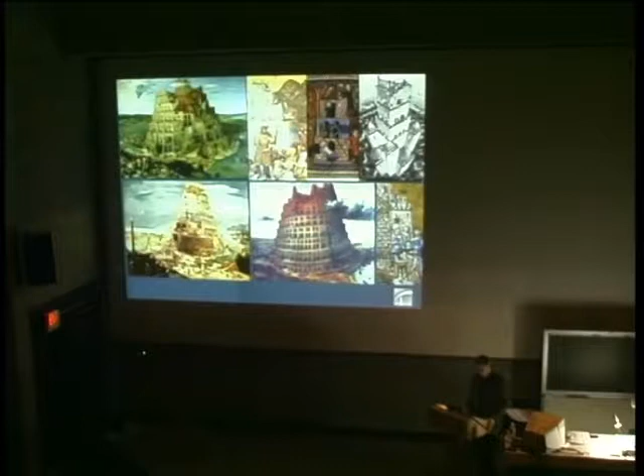These are all examples of the history of tall buildings. And it's not over, of course, as you probably read in the news—some big ones over in the Middle East are underway. All the way from Gothic through Gaudi, the Washington Monument, and the Eiffel Tower.

Chicago holds a special place, though. Certainly for Chicagoans, and I think many others see it as the birthplace of tall building design, if one takes as a definition of a tall building a self-supporting frame—in this case a rigid frame—with a separate facade system.

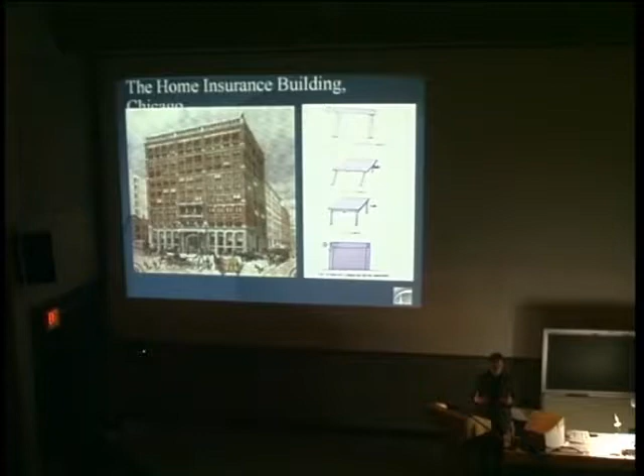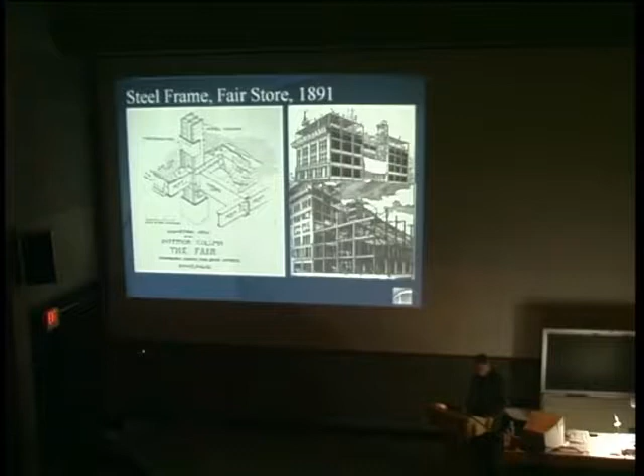In this case, at the Home Insurance Building, the brick was clipped onto the frame, and many found that as a definition of tall buildings, as opposed to load-bearing structures. This is another example of a William LeBaron Jenney building, the Fair Building, which shows the interaction between cladding and structural frame.

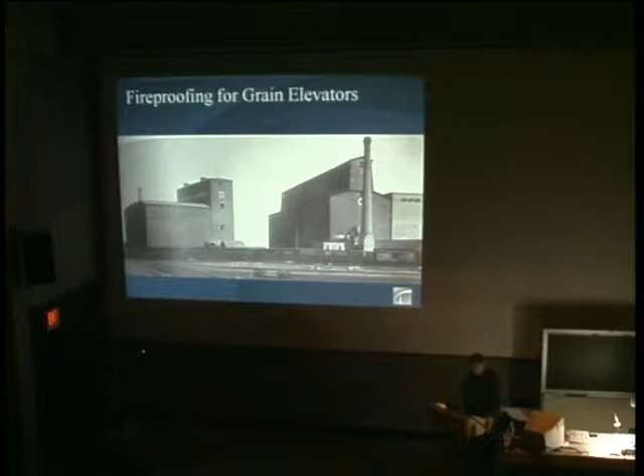There are a lot of reasons why I think Chicago was the center. There was a development of fireproofing for grain elevators, which was more of an industrial product, but turned out to be very useful in the fireproofing of tall buildings as well.

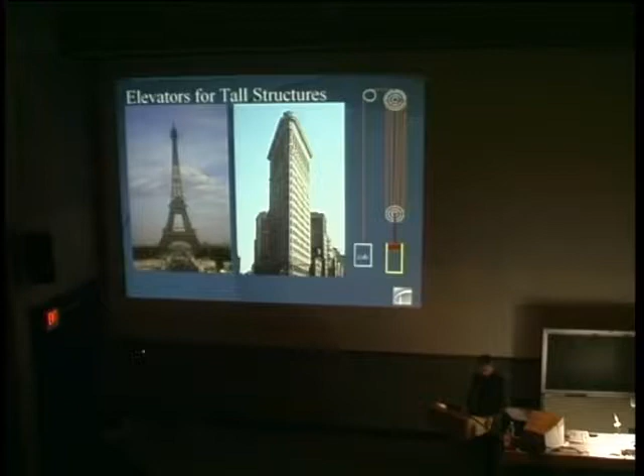Elevators were invented—it's not entirely clear exactly where. They were used in New York and other places, but it was a very critical element that came together more than a century ago that made tall buildings viable.

Going back to the origins of Chicago tall building development, I had the good fortune to work with Myron Goldsmith, who was a partner at SOM. He's passed away now, but he evolved a series of buildings through his thesis at IIT with Mies van der Rohe, which explored ways of scaling tall building structures coincident with how tall they are, and also using the structural concept as part of the architecture.

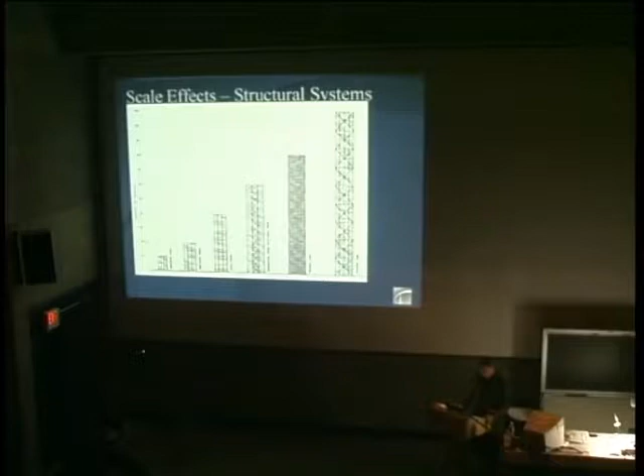He also evolved a series of systems scaled to the height of the building. The notion was that there was a certain scale to a building structural type—not something that could just be enlarged without end. There were a number of projects he worked on with students while teaching at IIT, and many of these worked their way into the offices of SOM, through both Myron Goldsmith and people like Fazlur Khan, who was the structural engineering partner at Skidmore and also taught at IIT.

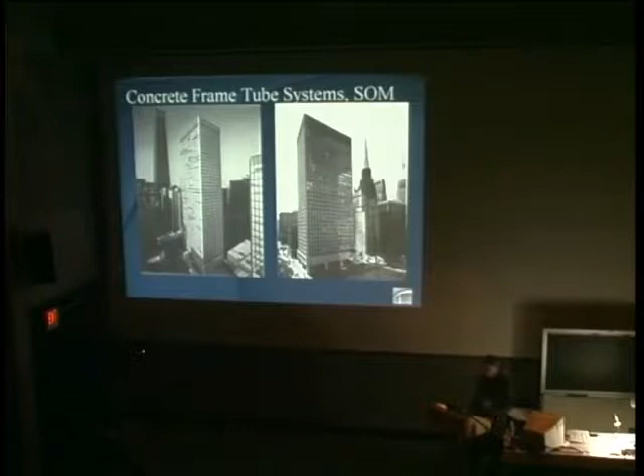These were concrete tubes, which Fazlur Khan sort of invented and utilized in a variety of ways at SOM. That sort of culminated in the bundled tube concept that was fundamentally the structural system for the Sears Tower, the tallest building in the world until just a few years ago, when it was surpassed by the Petronas Towers.

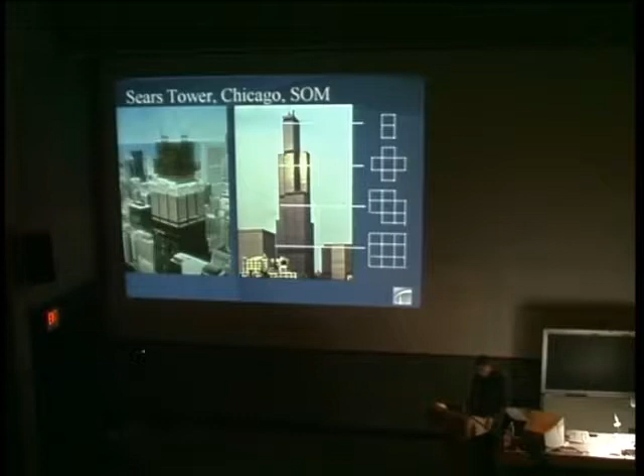But now, of course, there's more in the wings. The Taipei 101 exceeded that, and then there's, as I mentioned, really tall ones coming in the Middle East. There were other systems, other buildings that used this structural expression of the perimeter tube.

The Amoco Center, which was a concrete tube versus the steel tube of the Hancock building. Recently, we worked on a project in Chicago, scaled much smaller than the Hancock building, but utilized a structural frame for a project called Erie on the Park with Lucien Lagrange.

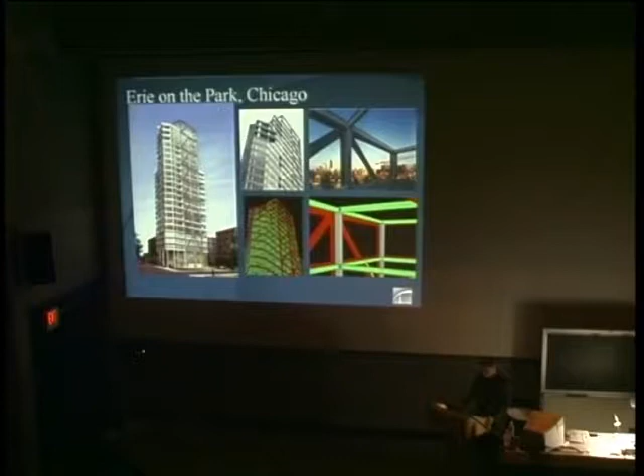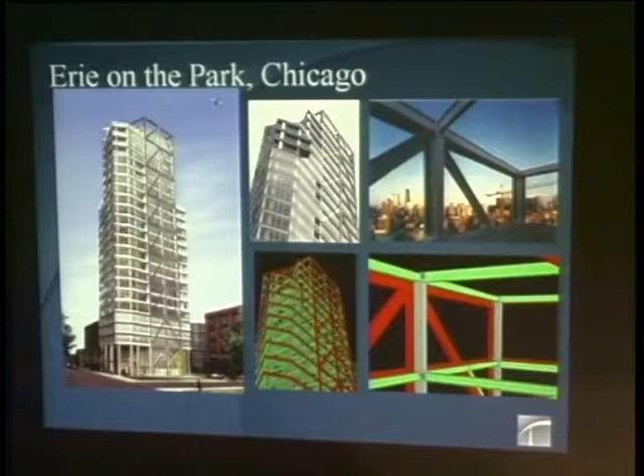It's an all-steel apartment building, not unlike the Hancock building, but we utilized a technique of 3D modeling of the steel frame to help procure the steel frame and have it fit together. I'll touch on this more in the second part, but wanted to mention it briefly here. It did utilize sort of a super frame for that building, and it was part of the architecture. There, of course, are many examples of these type of buildings from New York to Hong Kong.

The Citicorp building, on the other hand, and I did have the good fortune of working with Bill LeMessurier as well, who designed this building. Bill worked with an architect, Hugh Stubbins, who didn't feel it was important to express what was a very efficient building, but rather clad it with aluminum and glass cladding. You can see it at night, though, when it's lit up.

One Liberty Place by Thornton-Tomasetti and Helmut Jahn shows another type of structural system that begins to show the evolution of tall buildings from the tube buildings, which were sort of dominant in the 50s, 60s, and 70s, and certainly the hallmark of SOM, to other mixed systems.

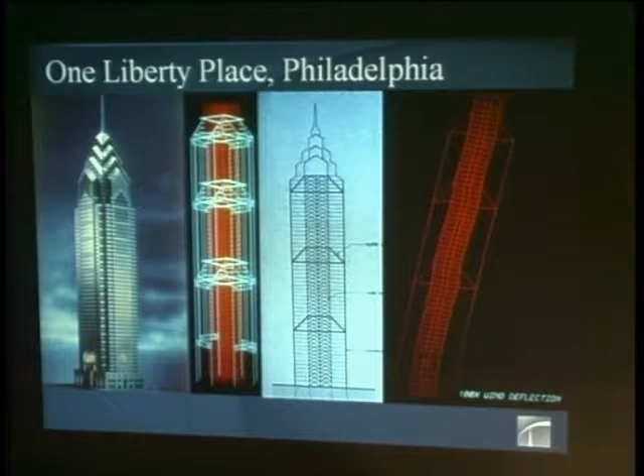This is a system of core bracing and outriggers, and systems like these are in a sense the combination which are making the tall buildings of today. I mentioned one other super frame when I mentioned the sort of evolution from the work of Goldsmith and Khan from 1953. This was his thesis at IIT.

Which involved a series of super frames, and this was a project just actually when I was starting at SOM, that maybe one of Fazlur Khan's last projects before he died, which was again a super tall building, but with a super frame concept.

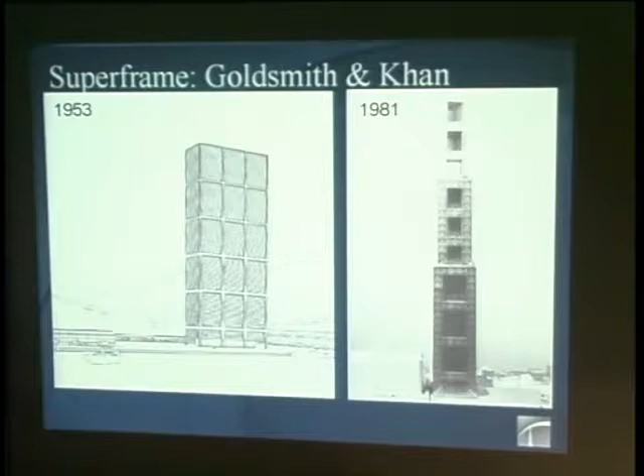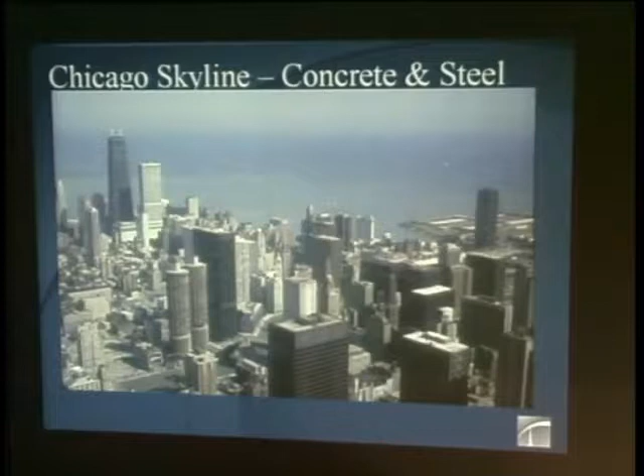Concrete and steel. Most of what I've been talking about is sort of steel frame buildings, but there are a lot of concrete buildings in Chicago, particularly apartment buildings, and most notably, from the beginning of their evolution in the 50s, the Marina City by Bertram Goldberg. But there are many others.

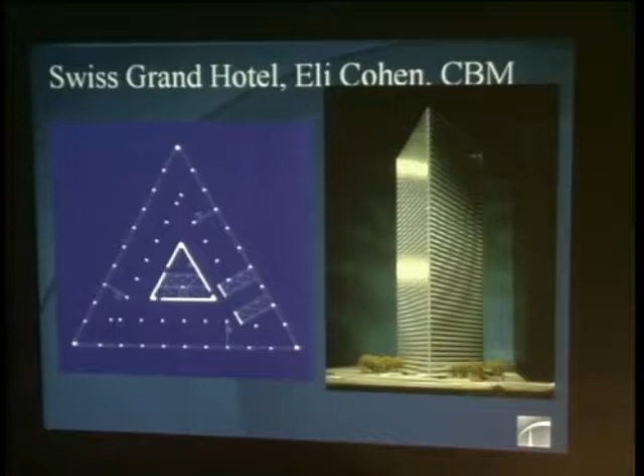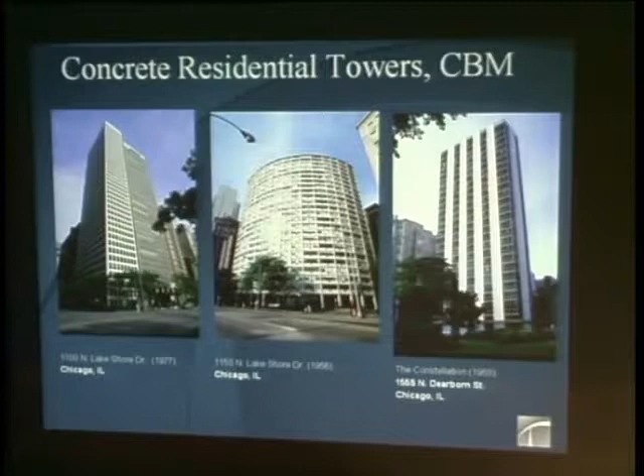This is the Swiss Grand Hotel, which is a triangular building, a series of residential towers by CBM, which was a predecessor firm to Thornton-Tomasetti. We merged with them in 1993. Eli Cohen was the engineer there. It's a whole series of sort of residential buildings, and not just by us. It's a very common building type in Chicago.

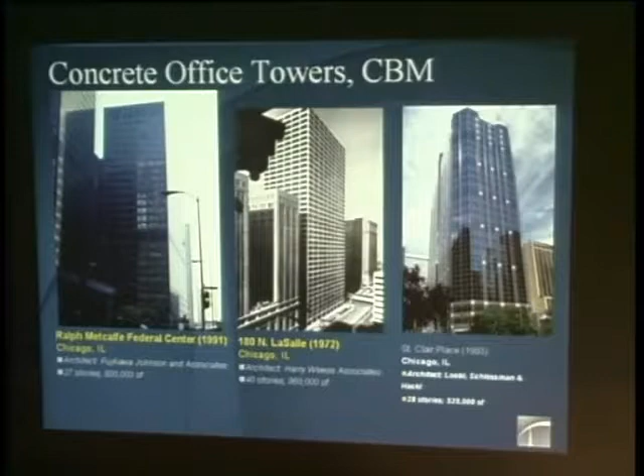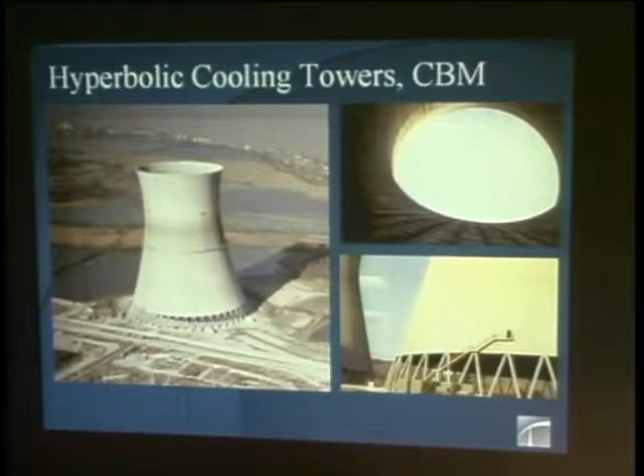And maybe a building that wasn't constructed, though Thornton-Tomasetti went a long way with it in terms of getting building permits. This was a 2,000-foot tall tower, which would have been the tallest building in the world had it been built in 1990. Very, very slender. This was, in my view, one of the turning points, away from massive steel structures like the Sears Tower towards concrete structures for the tallest buildings in the world.

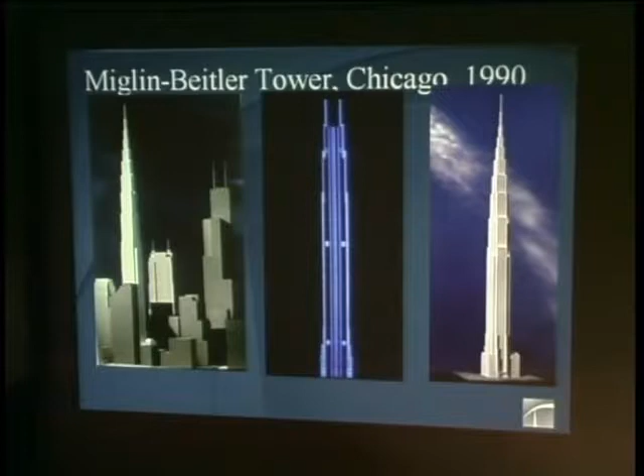This building, after a number of wind tunnel tests, it was decided the only way to build it really was in concrete, because of the mass damping, the efficiency of material, and at least in Chicago and now in many parts of the world, high-strength concrete that's available. So here it is in the wind tunnel tests. As I said, a lot of work was done on this.

This is the other thing. I think maybe one of the themes I wanted to leave with you today is the things you learn on one thing, you don't know when it's going to come back to help you later, as I mentioned, either on small projects or big projects.

This was the plan, which was also very innovative at the time, the notion of a concrete core and then massive outrigger columns that would serve as the only both gravity and lateral systems for the tower. And again, these walls, massive walls, which were done in reinforced concrete.

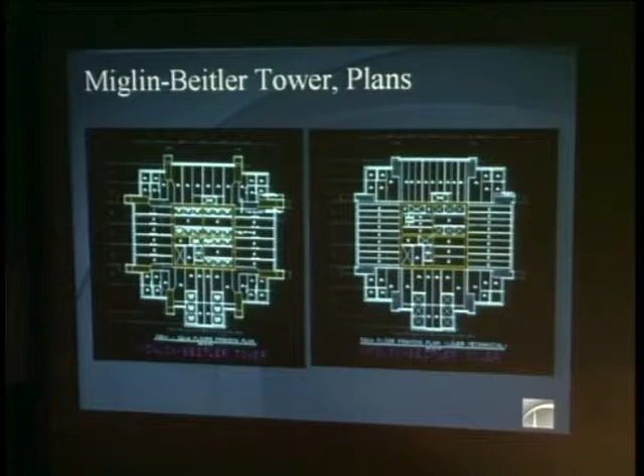So that project died, and then in the middle 90s, there was a competition for the Petronas Towers for Petronas. It wasn't, the winner, as it happened, was a Twin Towers by Cesar Pelli. And it didn't start out as the tallest buildings in the world, but it did start out with very similar structural systems as the Miglin-Beitler Tower, basically reinforced concrete, outriggers, a core wall, and structural steel framing.

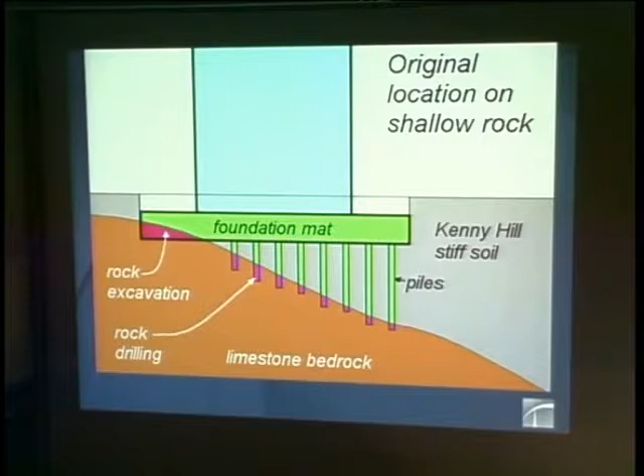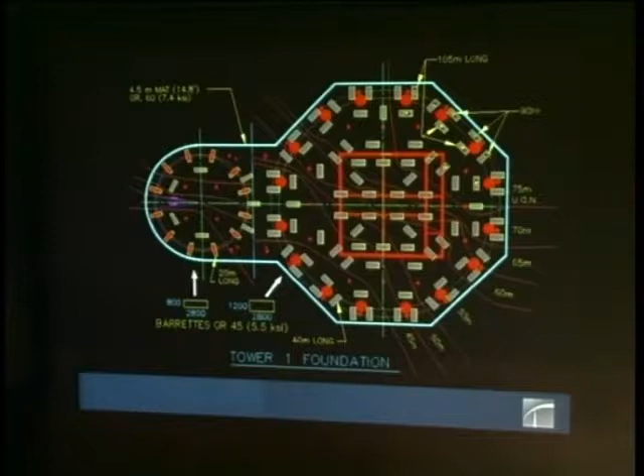There were a number of complexities with the project. There were foundation issues that had to be solved that could have resulted in tilting towers, like the Pisa Tower. That was solved by moving the towers a little bit. This is one of the things that happens in big buildings: the number of intricate problems multiply. Many of them are small problems in and of themselves, but added together, big problems. In this case, a very complex foundation system.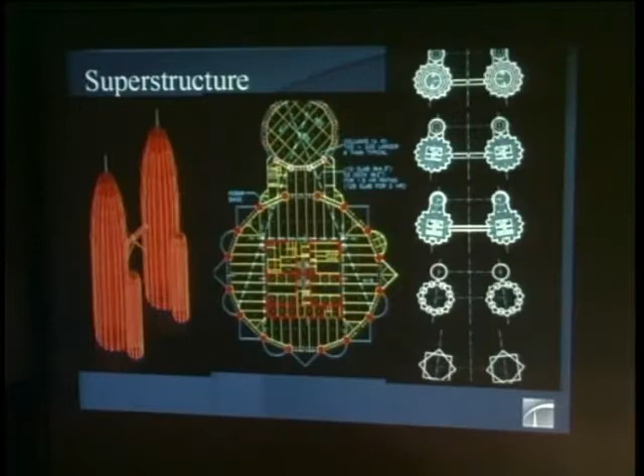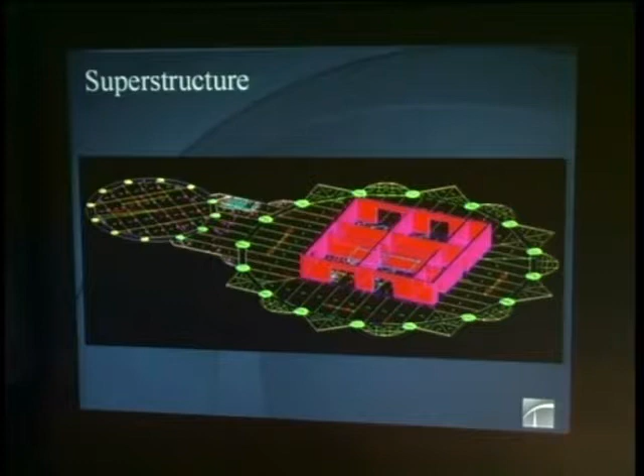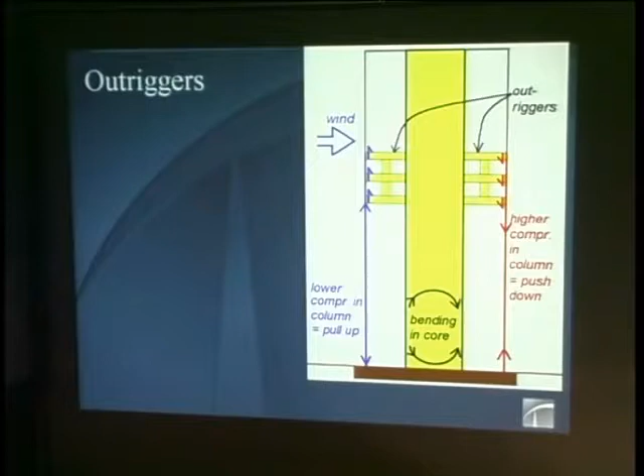Wind tunnel testing, as we do on most of our tall buildings, both with and without the future buildings. And a relatively complex superstructure system, which consisted of erecting this concrete core wall system I mentioned earlier, a series of perimeter concrete columns and girders, and then filling it in with structural steel framing, which is this mix of composite steel and concrete, and then the steel balconies. And then as the building advances upward, outriggers allow for the increase of the width of the building through these coupling girders and trusses.

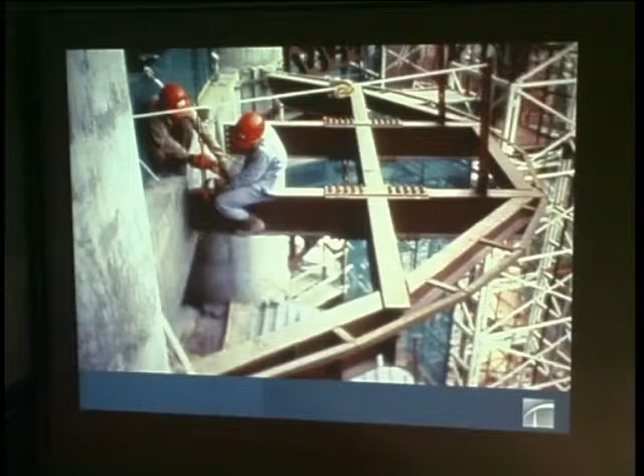So here's some pictures of Petronas Towers under construction. There were actually two different contractors, a Korean and a Japanese contractor, and they raced each other, which was a good thing for the owner of the building.

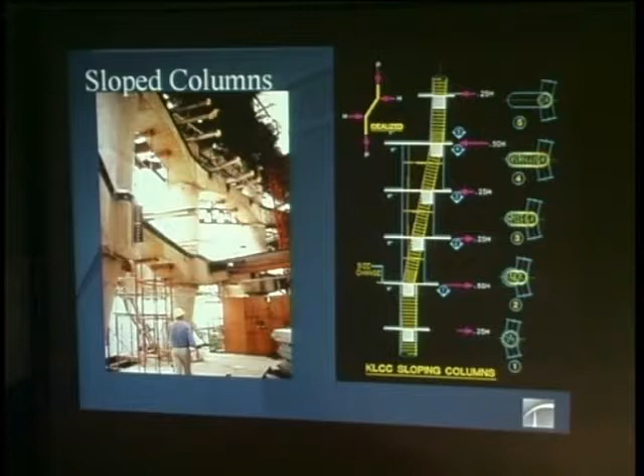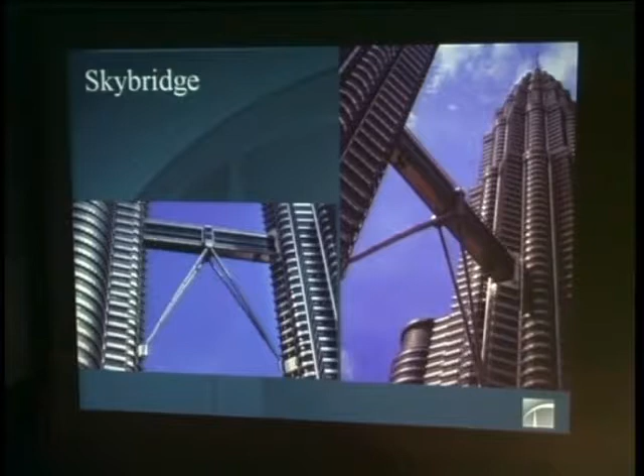There were a number of other smaller problems. These sloped columns, as the building gets smaller, how do you slope it? You slope them gradually rather than using big transfer girders. And of course the sky bridge was very complex as well. It was used as an exiting mechanism, but it was also a very important symbol of uniting these two towers visually. Again, in a sense, a small problem, but part of the bigger problem of a bridge system.

They even demanded tuned mass dampers to avoid wind vibration at certain wind speeds. And that's a theme that comes back in many of our projects: vibrations, particularly due to wind.

And in the case of Soldier Field, due to crowd vibrations, these are issues we deal with as structural engineers.

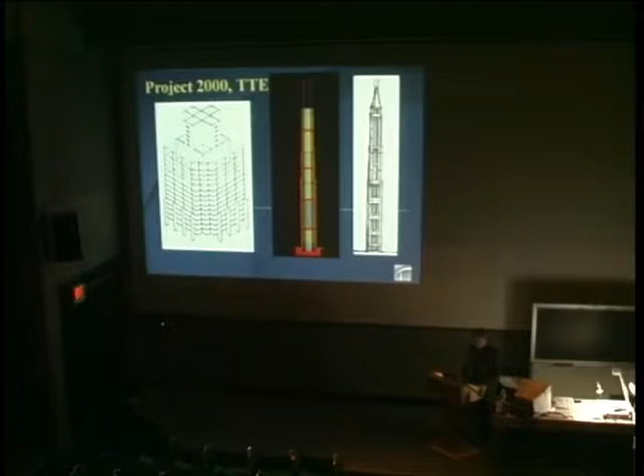Here we actually got as far as wind tunnel tests. This is in the test tunnel along with SOM's 7 South Dearborn. This was competing for that same owner, and as it turns out, they picked SOM, but neither of us won. None of those projects got built. This was an odd test in the most unlikely event that both of these towers would get built. I guess we had that other tower in there. We were involved in consulting on the current tallest building in the world, Taipei 101.

That too has a tuned mass damper, very heavy. It's an all structural steel building. For everything I said earlier about change, you could ask why the tallest building in the world is all structural steel. Well, it was funded in part by the Taiwanese steel industry, and they didn't really care how heavy it was or how much it cost—it had to be all steel. But I think economics would have suggested a different system.

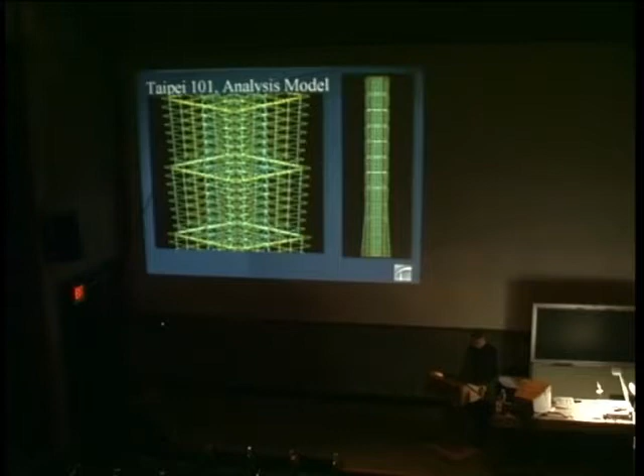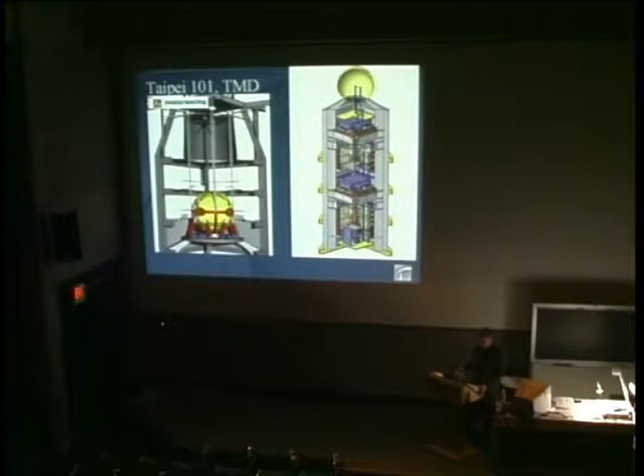This is the structural system I mentioned earlier, a mix of core brace system with outriggers, but you can use these things interchangeably. Very complex tuned mass damper—it's actually a pendulum hung from the top of the tower, and it swings. There's a bar around it so you can watch it move if it's windy outside.

And I finished tall—let's see how we're doing on time. I'm going to move on, but I want to mention the concept of space elevators from NASA. NASA is actually working on this now because materials exist to make it possible. They thought of this in the 60s but didn't think materials existed. But now with carbon fiber, the notion is a space elevator: build a platform far out in space in geosynchronous orbit, connect it like a pendulum with carbon fiber, and send elevators up and down. So this is as tall as you could go.

But let's move on to another thing. I'm going to move fast here. We're going to go wide.

This part two interlaces the concept of what's going on in the AEC industry—the architecture, engineering, and construction industry—which is in transformation, primarily due to three-dimensional modeling. I suspect many of you are experiencing that in school, from Form Z to other programs, but it's affecting business in a sort of unusual way. I'm going to talk about that and some big, wide buildings, particularly Soldier Field and the airport mentioned earlier. This transformation is coming from two directions: top down and bottom up.

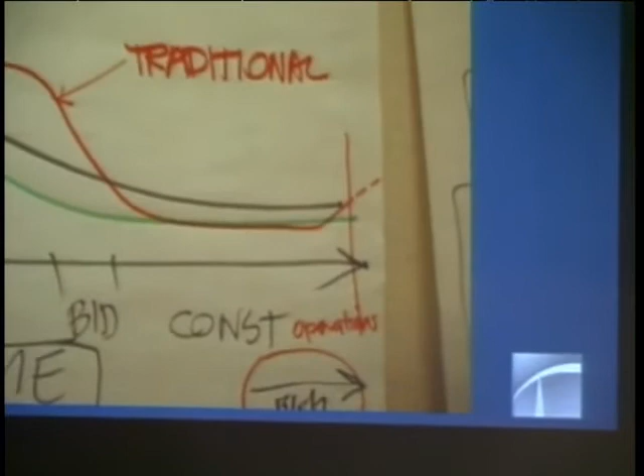This is a sketch from a committee I'm on, the AE Productivity Committee. The whole notion is that owners need to take leadership in integrating the building process, and that three-dimensional information needs to be openly shared, not held internally. Because right now everybody has their own models, but what's being shared is two-dimensional information. It's a little like medieval scribes, sending information over and having people recopy the three-dimensional information.

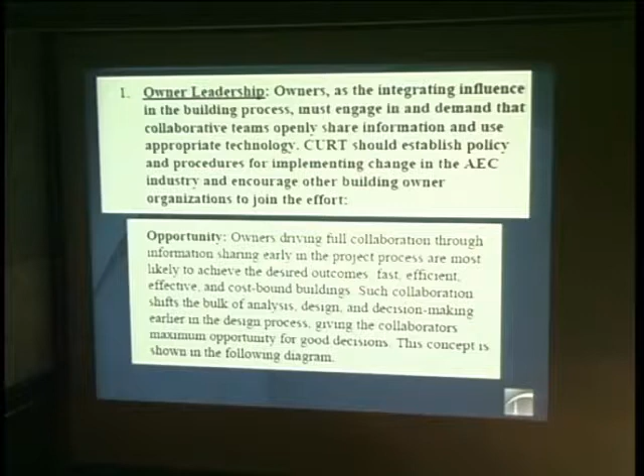The question is, how can we increase the productivity of the construction industry? The auto and aerospace industries have already done this, and they've achieved tremendous increases in productivity.

This is the notion that the traditional design process, shown in red, suggests we start with concept design and schematic design, design development, and have our peak effort during construction documents, where we produce the drawings used to construct buildings. In fact, the ability to affect the impact of cost and functional changes decreases rapidly during the design process, while the cost of changes to the design increases.

So the idea is that we need to move our efforts of three-dimensional modeling earlier into the process. In any event, the Productivity Committee envisages much more interactive, collaborative teams.

At the same time, there are industries that comprise the construction industry working the other way, and probably the most notable among them is the steel industry. Steel is now a global industry, shipped all over the world. The steel was detailed for Soldier Field in Perth, Australia, and in England. It's truly global, and it doesn't just serve the construction industry, it serves many other industries.

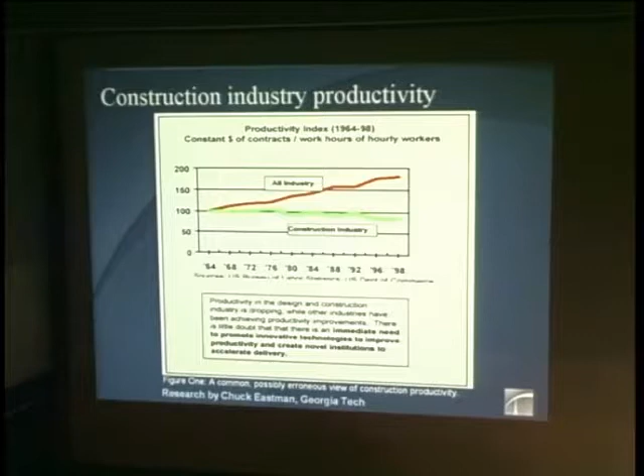In terms of productivity, all industry has increased rapidly from the 60s through the last few decades - that's the red mark. Having said that, the green mark represents the construction industry, which has actually lost productivity over the years. One wonders how can that be. A lot of it is because this is a very labor-intensive industry where a lot of things happen on site.

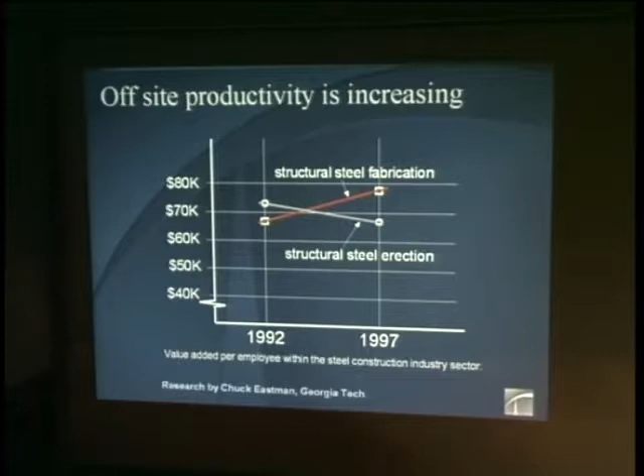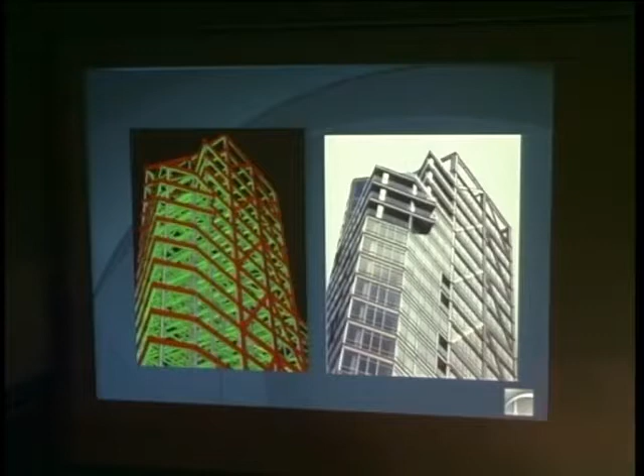Interestingly, the steel industry has similar loss of productivity when it comes to steel erection, the on-site portion. But the fabrication side, which is more of a manufacturing side, has experienced the same productivity increases, through products like this. This is the tall building Erie on the Park, using a program from Finland called X-Steel, which models every bit of steel, every connection, every bolt, and integrates both the design side and the supply chain of fabricating steel. This is an example of the top of Erie on the Park.

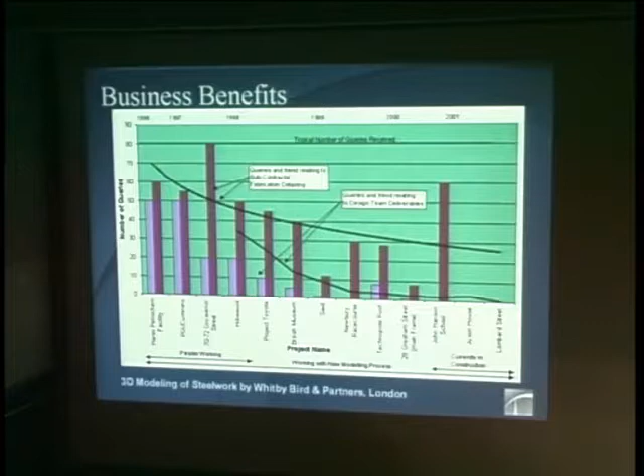We've learned this through a consulting engineer in London, Whitby Bird, who utilized this same technique of using the software on the design side and saw increased savings over time as he used it - meaning steel was really becoming a commodity once one gets this complex stuff out of the way, if steel is being fabricated by machines. Conversely, there were fewer and fewer RFIs, requests for information, during the shop drawing phase.

What's been driving this is an integration standard that was invented by the Europeans but adopted by the North Americans as the North American standard, and now it's become a global standard for computer integrated manufacture of steelwork. Software companies are now writing to this standard, and it's really important that it's an open standard - one that's showing up more and more in software we use in the steel industry.

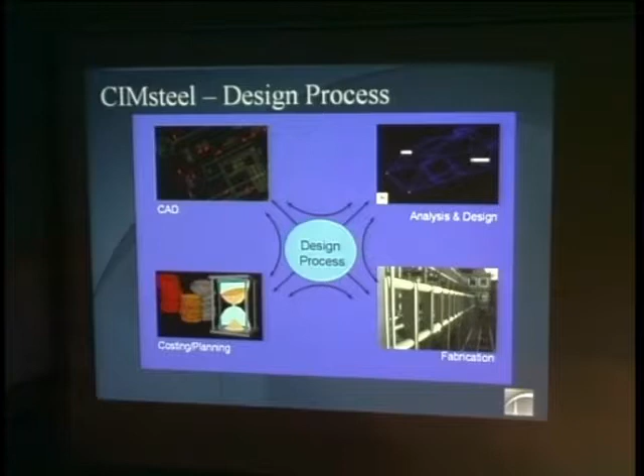The whole idea is to create a standard by which we can pass information along the chain - from drawings, analysis, and design through fabrication, costing, and planning - to make that particular product more efficient, and thereby the whole industry. This integration continues.

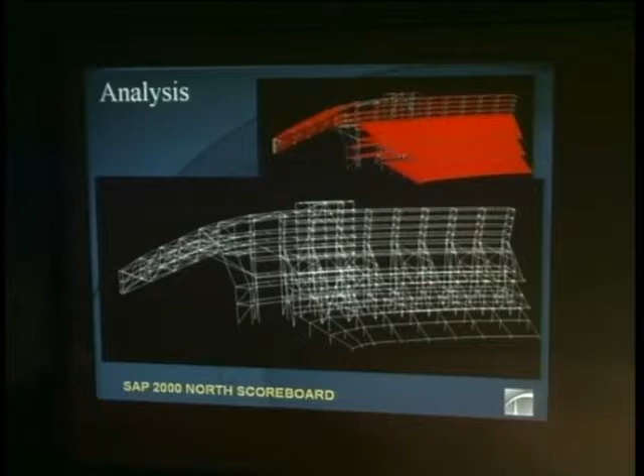This is an example of 3D modeling of Soldier Field. In terms of structural analysis and dynamic analysis, when we worked on this in 2000 or 2001, that integration didn't exist, so we had to copy this information over manually. This same software today would be integrated with all of the X-Steel models - that's how much things have changed in just a few years. This is one of the big cantilevers for the scoreboards at Soldier Field, based on that model, and this is actually how we check shop drawings.

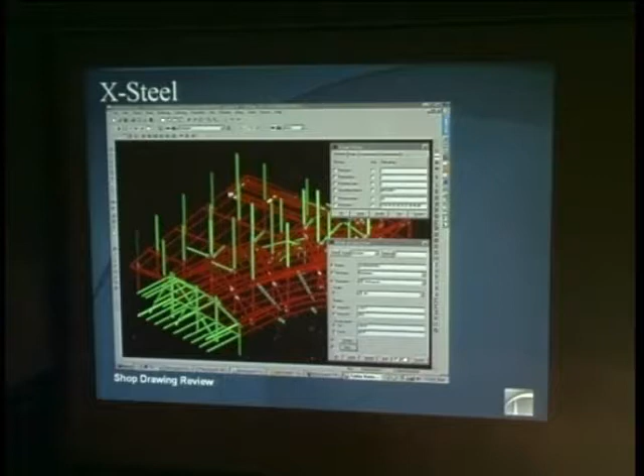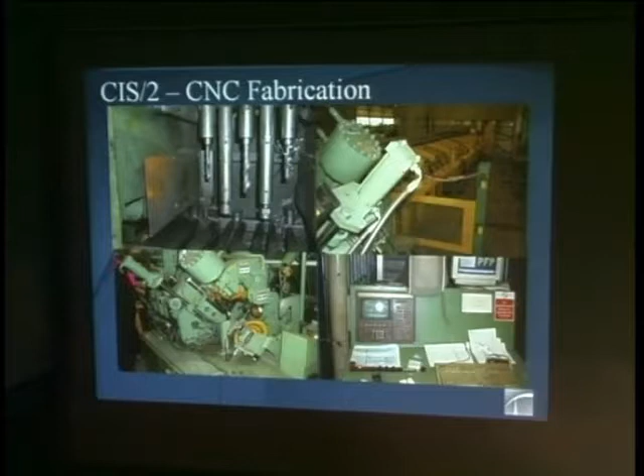The three-dimensional information was shipped back and forth from steel fabricators, the steel detailers in Perth, and our offices in Chicago. Most steel fabricators still in business have invested heavily - millions of dollars - in equipment like this that cuts and punches steel. It's very important these machines are driven by computer code, downloaded from software programs like X-Steel. The steel industry has also adopted standards for simple things like barcodes, which have increased productivity - something companies like Walmart were way ahead of us on. But again, these are the kinds of things that will make the costs of your building designs more cost effective.

Next, there aren't too many industries that have taken this, but just recently, and it's an important change, is the precast concrete industry. These are a couple slides I picked up from a talk I attended recently at Iowa State. I'd heard about this precast concrete software consortium hiring the same software company that did X-Steel, Tekla, out of Finland.

They created a very similar modeler for the precast industry, one that would integrate the supply chain. They hired Chuck Eastman from Georgia Tech, one of the experts on 3D modeling and interaction with engineers. They were chosen in 2002, and we actually have the beta version. The whole notion is to support automated engineering and detailing, literally detail all the rebar inside a precast element, hopefully reduce and eliminate errors, improve quality, and support plant automation.

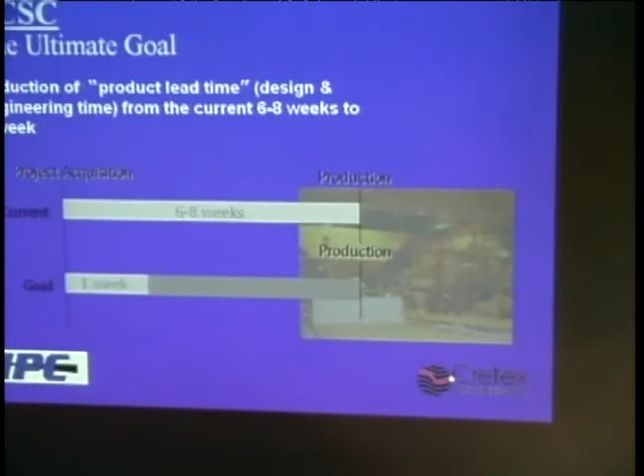But this is the most fascinating thing: right now when they get a project in a precast yard, it takes 6 to 8 weeks of engineering time before they can be out in the yard. This is a goal they may not achieve, but they think they can get it down to 1 week. That will translate directly into the cost of precast products and the speed at which one can move. My hope is we get more time in design then, but that's not usually what happens.

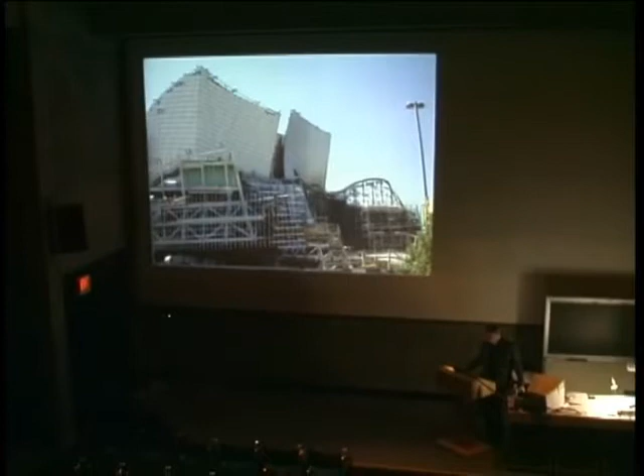The cladding industry, the enclosure industry, is not as well organized. This is, of course, the thing that's driven a lot of this, and I haven't mentioned Frank Gehry yet, but we all owe him a lot. His group that produces his buildings has been one of the leaders of using 3D models to move the industry forward. One could say that without that technology, he couldn't be building as much as he is building. A lot of people, particularly cladding contractors, have picked this up.

Permasteelisa is one of them. They're out of Italy. They have adopted 3D modeling throughout their production methods, both in terms of design and fabricating, to take advantage of the information they can get from people like Frank Gehry.

So there's a long way to go there, but it's very critical if all this is going to work. There's a consultant in Finland, Olof Granlund. Why is it that all these people are in Finland? It's because of Nokia. It's such a small country and they can't get people to move there, so they realize they have to compete with Nokia in Finland to get smart architects and engineers to work for the construction industry rather than go work for cell phone makers. So there's a reason why all this is going on in Finland.

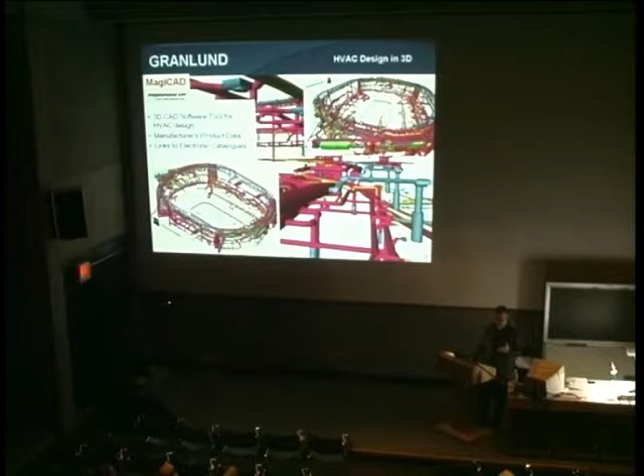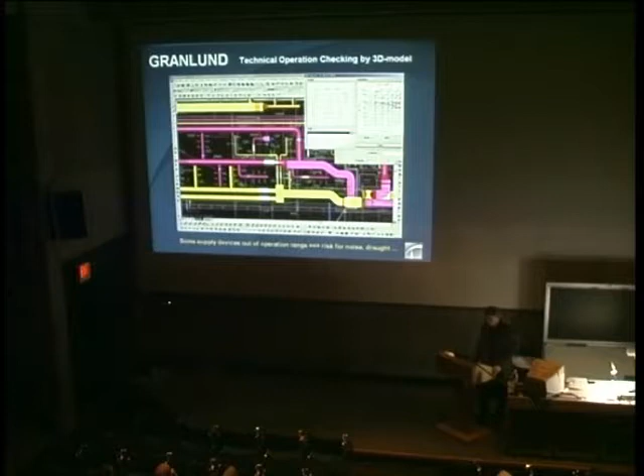But anyway, this is an MEP company that only works in 3D. They have a total three-dimensional workflow - the job comes into the office, it's instantly in 3D. You won't find anybody like that in the States that I'm aware of. Here are some examples of their work using software developed in Scandinavia. And of course, this all comes out of the 3D model into 2D drawings.

All this is about this notion of a building information model. Maybe some other people have talked about this, but it's a notion that's moving rapidly forward in the building industry. The GSA is talking about piloting projects where the whole team will work in 3D by 2006, at least in pilot projects, and you would produce a three-dimensional computer model as part of your deliverables. The whole idea is that this model is accessible to everybody on the construction team, not just the design side, but the subcontractors, surveyors, fabricators.

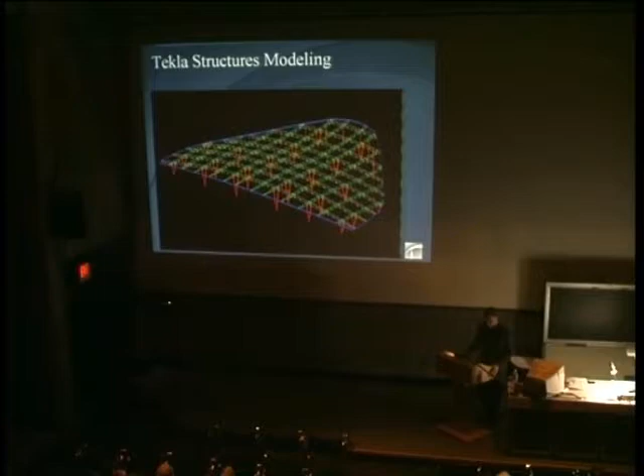With that in mind, and it's not entirely clear yet, we're working on, as I mentioned, the Indianapolis airport. This is a structural model of the roof in X-Steel, which we worked on in schematic design. There are some examples, again, of using 3D on the structural side early on.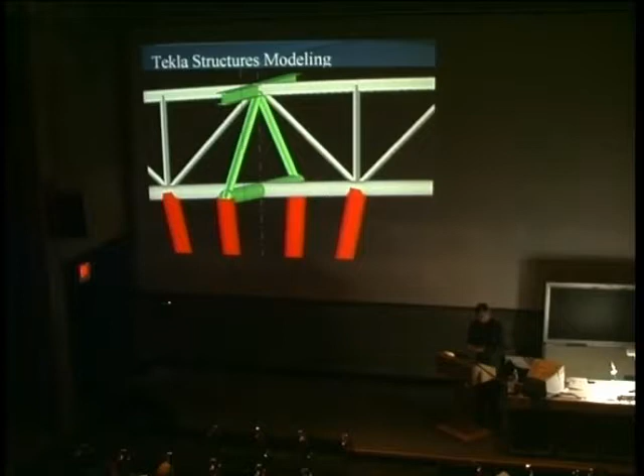This is some of the details, again, where you can actually see how things come together. We haven't really got into the connection design yet, but you can get a sense of how things are fitting together. I threw in a couple of images of...

The airport, for those that might be interested. HOK is the design architect. There's a whole consortium of Indianapolis architects and engineers working with that. We were the design engineers, and there's an Indianapolis structural engineer that's the engineer of record. Exactly how it's going to be procured and how 3D will be part of it hasn't been decided, because all of these things have legal implications. It depends upon the contract type. There are lots of advantages to utilizing this technique, but it's still working its way through the system.

Thornton-Tomasetti is continuing to move the notion for, at least on the structural side, of 3D. We now have a small and growing group in Kansas City doing three-dimensional modeling for steel detailing. We think that in order to achieve real benefits, we have to bring that kind of service into our practice. Again, an area that traditionally hasn't been done by engineers.

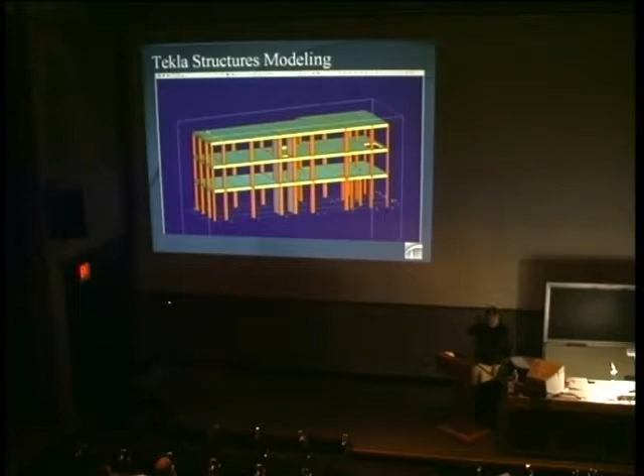This is a concrete building. We have our new Tekla modeler that does concrete as well as steel. As I mentioned, eventually we'll have the version that does precast.

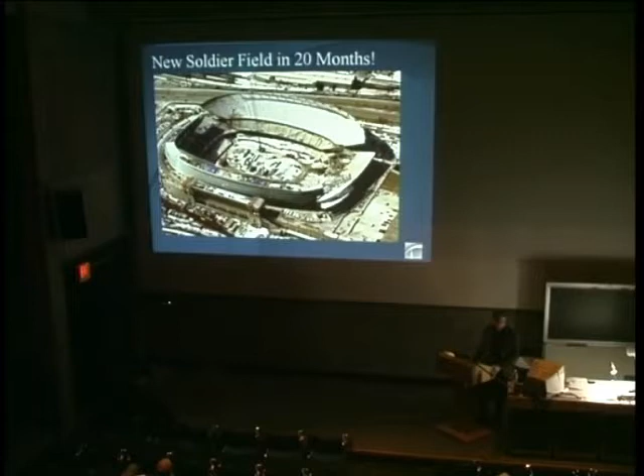And finally, Soldier Field. These will have some images of Soldier Field as well, but our use of 3D modeling, I think, allowed us to achieve this very critical goal of finishing in 20 months. The Chicago Bears did not want to be out of Soldier Field for more than one season, which meant 20 months.

There were a number of roadblocks, including 9/11, which delayed the season one week, and then inexplicably the Bears were in the playoffs that year, so we were actually delayed more like a month. So we got going...

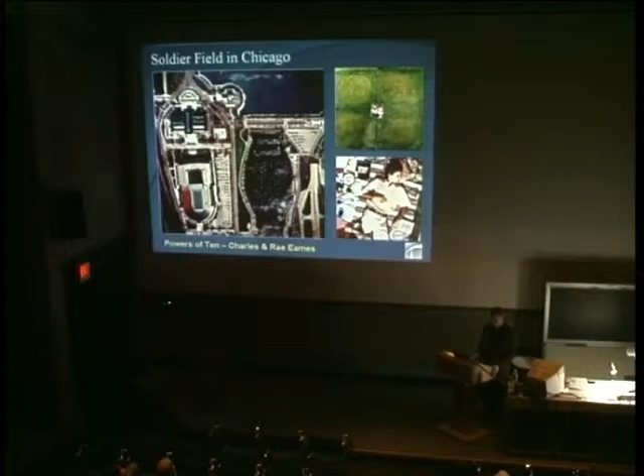Just to back up a little and talk about Soldier Field. This is the lakefront in Chicago. This is actually a picture from Charles and Ray Eames's book Powers of 10, which interestingly was focused on Soldier Field. I picked the picture because you can get a sense of the way it looked when Soldier Field was encircled by Lakeshore Drive.

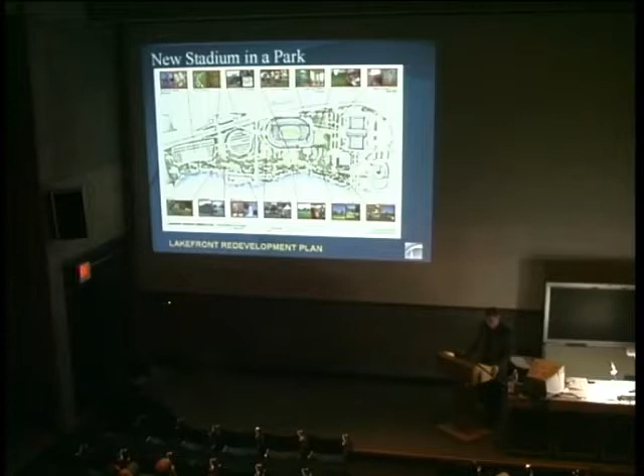In the end, the goal was to create a stadium in a park. Of the $600 million or so that was spent, $100 million was spent outside of Soldier Field on the infrastructure. And of course, that all had to be done in time for opening day.

But what was very interesting about Soldier Field is there are no stadiums like it. It's very asymmetrical. All of the clubs and skyboxes are on one side of the stadium, and the other side is a very open-air grandstand stadium, which was done to squeeze this into the existing walls of Soldier Field, which I'll show you in a bit.

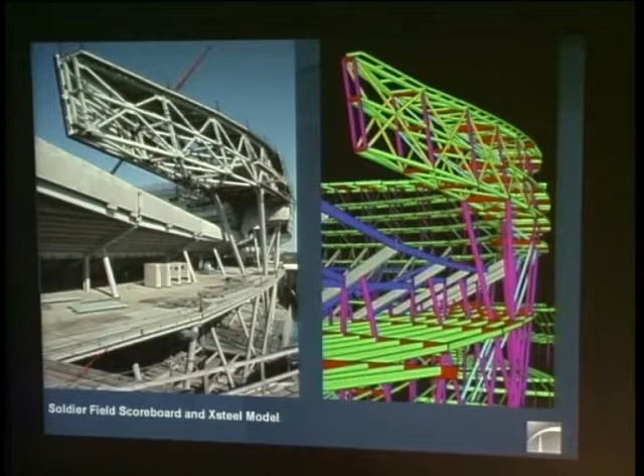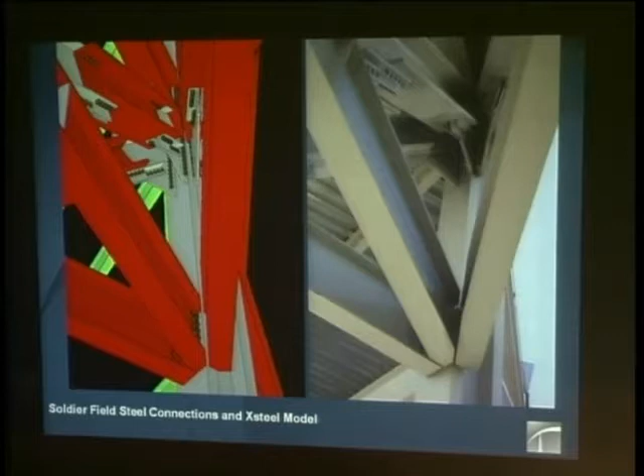This was our use of the X-Steel modeling on the scoreboards. These are examples of the grandstand modeling and the structural steel. This is the sort of detail you can get to in the shop drawing review, where everything does fit together, and that's the beauty of it when you're out in the field. Things fit together because these products have been cut and punched with machines, not unlike a three-dimensional laser printer. This is an example of the skyboxes.

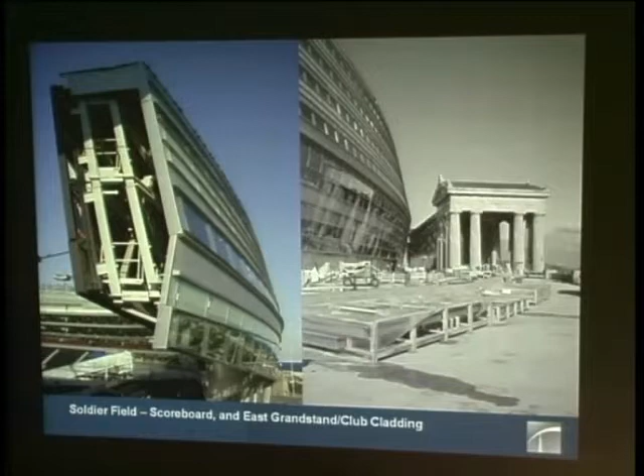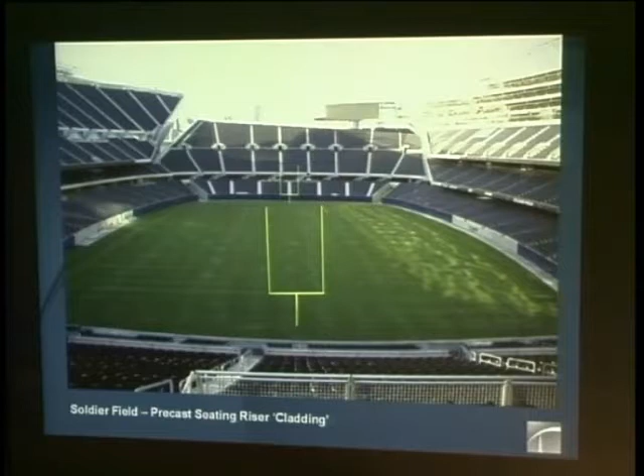And it was all panelized. It came in these pallets that you see on the right. We detailed a lot of cladding in X-Steel, in the case of the stainless steel cladding on the underside of the bowl.

And precast, well, that's the one area where we could have used this new product that's just being invented. We had a lot of conflicts between the precast and steel. The precast was detailed in a two-dimensional world rather than a three-dimensional world, and we're looking forward to a future where these two materials are married together.

The other big problem we had was MEP, which I mentioned earlier—mechanical, electrical, plumbing.

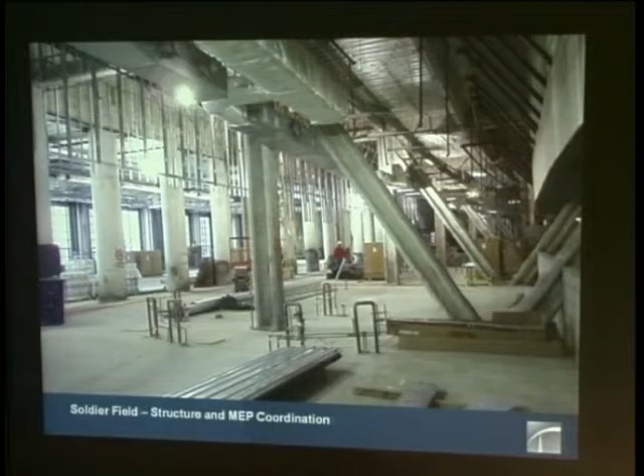In this particular case, it looks like there's lots of room, but in fact there were lots of other places where the mechanical just didn't fit, in part because the mechanical contractor didn't get on board until after we had already finished checking all the shop drawings on steel. So it was inevitable that we were going to have problems there. I'm looking forward to a future where we see more interaction between structure and mechanical in 3 dimensions.

These are some views of the concourse on the west side, where you can actually walk around the colonnades again. This is a view inside the stadium from the big grandstand.

By the way, there's little doors up along the back wall. Those are access hatches for tuned mass dampers that we designed and installed inside the tip of the cantilever to reduce vibration. So it goes back to those small problems within big problems issue.

This is a really interesting view in the north grandstands where you're looking inside the stadium and sort of outside at the lake at the same time. Very complex project. You still see the downtown skyline from the north end. And this is a view from the lake.

Well, I've still got 10 minutes, and Julie tells me I can use up 6 minutes that she didn't use when she was talking, so I get 16 minutes. I'm going to go to small now, and I have some images.

A whole range. I have the good fortune in Chicago to know a lot of people who used to work at Skidmore and don't work there now, and they're doing interesting things. People like Dan Wheeler. I do a lot of work with Dan. This is a series of houses, and now he's doing bigger projects where, again, there are other kinds of issues, but the same detailing issues arrive.

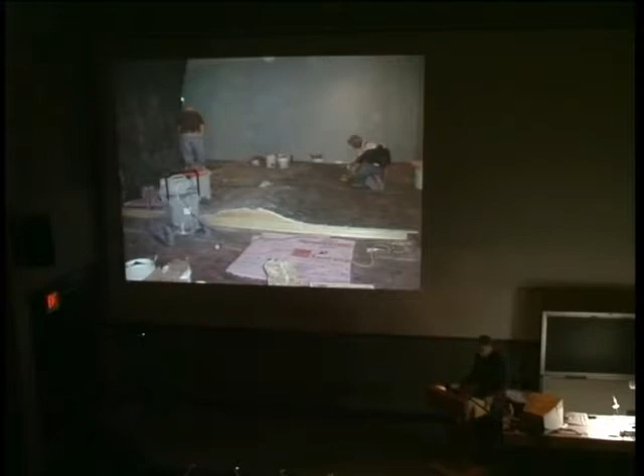This was a terrazzo wave by Julie Eizenberg from LA. By the way, Jeannie's from Chicago. This is Carlos Jimenez from Houston, a brick sculpture that actually moves around, using post-tension brick.

And finally, a series of AAC, autoclaved aerated concrete, a very lightweight block, which was sculpted by Winka Dubbeldam from New York.

This is a sculpture that we engineered with Doug, and Julie worked on this as well, on the steps of the MCA, Museum of Contemporary Art in Chicago. It's a whole series of lightweight structures anchored by precast blocks of concrete to keep it from blowing away, with elements that, again, some had to be engineered by going out and shaking it to see that it worked okay.

Because, try as you will with sophisticated engineering technique, sometimes you just have to go out and shake it to see if it works and decide whether you need to add a few more bracing elements. So this is it on the front steps.

We worked on a series of exhibits with Doug. This is the Museum of Time at the Museum of Science and Industry. I guess it's down now, I saw it - I was there recently and it wasn't there anymore.

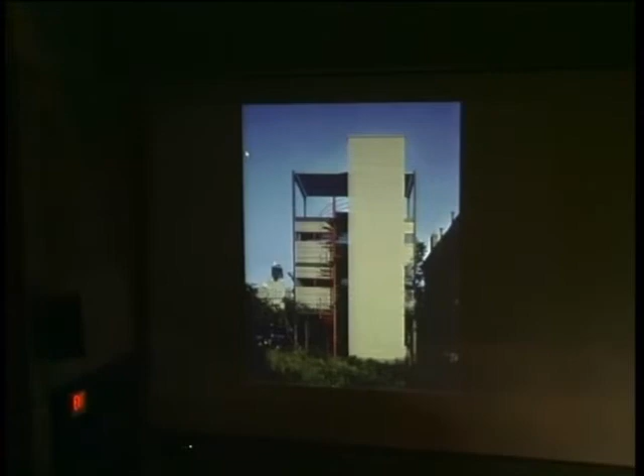How does an idea from something big get transcended down to something small? This is a picture from the back with that masonry box, which is basically a stairway and I think a potential future elevator if they needed one to get to all the levels.

We've done a lot of unusual special projects. In this case, this was a movie we did with Warner Brothers, where we designed all the structural steel gimbals, or elements that move an airplane around. The movie was U.S. Marshals with Tommy Lee Jones and Wesley Snipes.

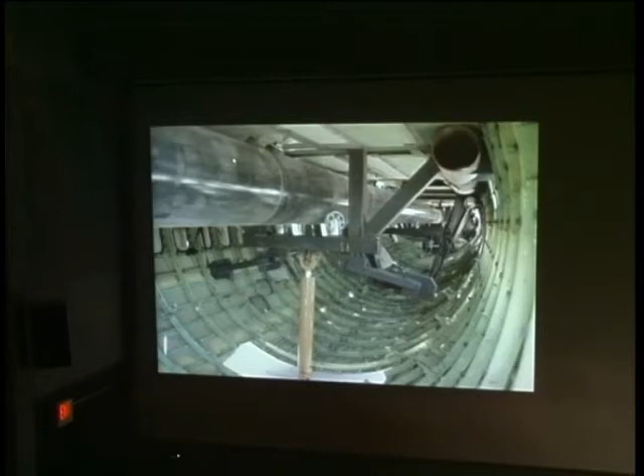They shot it in Chicago, and I think we were the only engineers who said we'd do it, but we had to roll this 727 fuselage around, and you learn a lot of things from that - things that come back later when you're not expecting them. This was a picture of another gimbal that moved up and down.

This is White River Gardens, the botanical garden we worked on with Woollen, Molzan and Partners. I actually was a partner of Evans Woollen Molzan for a while. I left Skidmore for a few years and worked as an architect and engineer with Evans in the 80s, and still worked on a number of their projects. He's a really good friend, good designer. I know there's some Ball State grads in that office.

In any event, this is some views of the exposed structural steel inside of the botanical garden and a view from the front. And I think this is my last image.

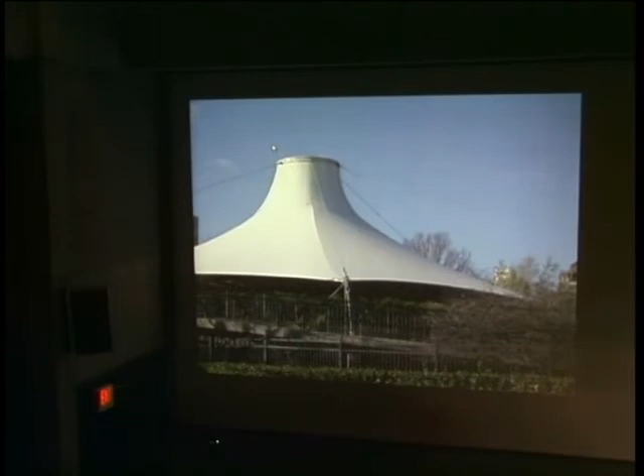This is speaking on the small side, this is another zoo - the Lincoln Park Zoo in Chicago. We worked on a fabric roof over an existing building which houses now a carousel, but the idea was to make a very simple modern covering for it in lieu of the sort of 19th century carousel which is below it. And I think that's it.

Thank you. Any questions? Thank you.